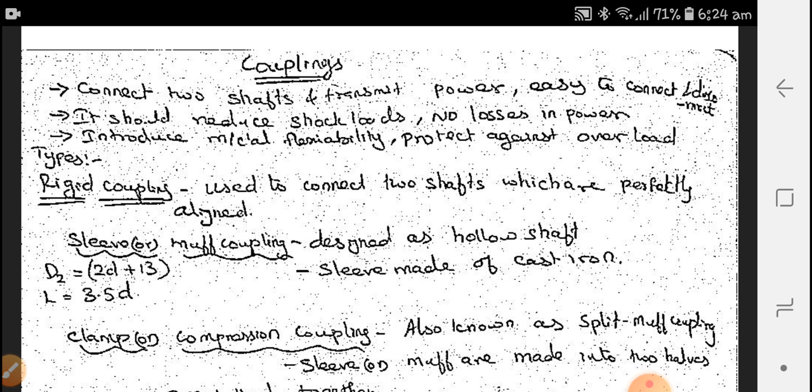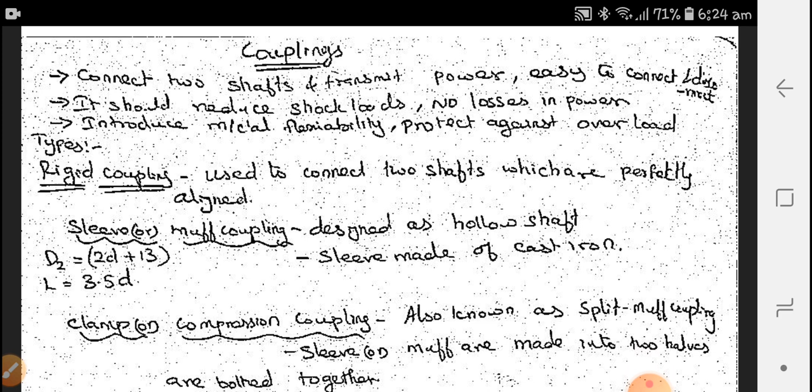Today's topic is coupling. What is meant by coupling? Coupling is a member which connects two shafts and transmits power easily, allowing them to connect and disconnect. This is the main purpose of coupling. It should reduce shock load, cause no loss in power, introduce mechanical flexibility, and protect against overloading.

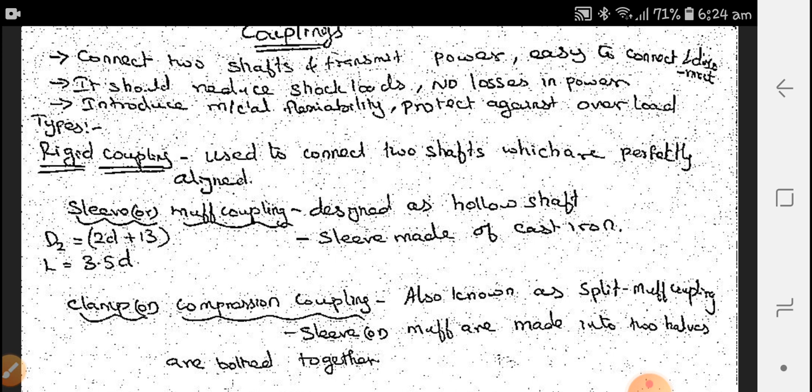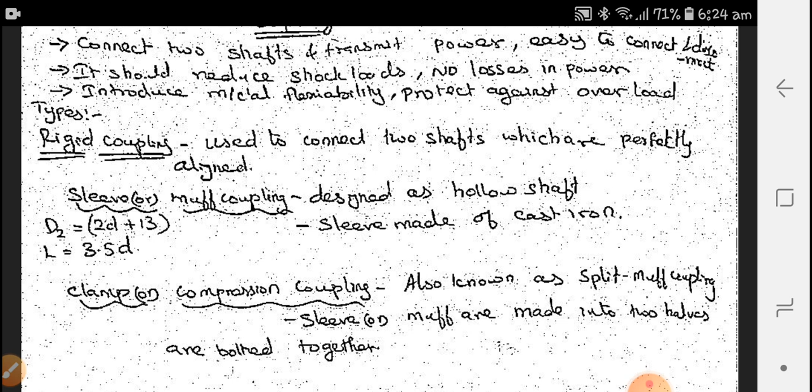We know that there are two types of coupling: one is rigid coupling and another is flexible coupling. Now we are going to discuss rigid coupling. Rigid coupling is used to connect two shafts which are perfectly aligned. What is meant by rigid? There is no deformation, there is no dislocation. So from the name itself you can know that rigid coupling is very strong.

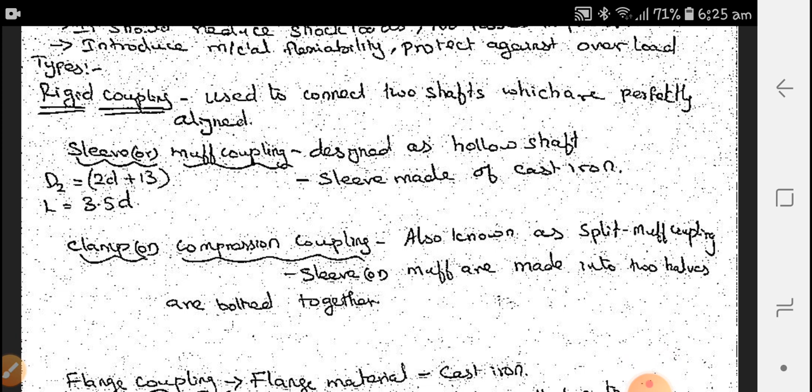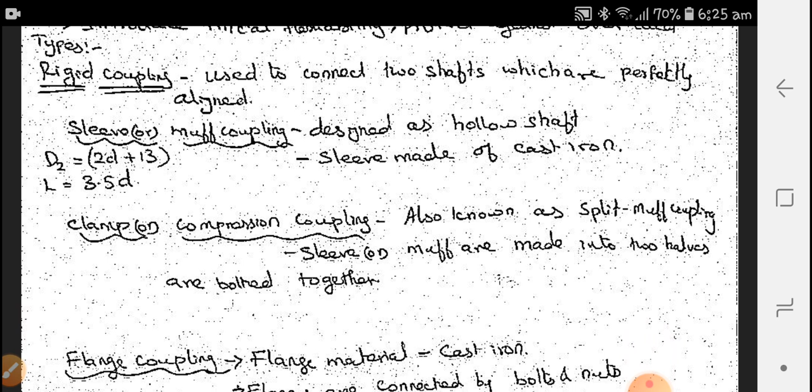In rigid coupling, sleeve or muff coupling is one type. The sleeve or muff coupling is designed as a hollow shaft, and mostly the sleeve is made of cast iron. Two parameters are considered important: capital D, the diameter of the hollow shaft or muff coupling, which is 2 into d plus 13; and small d, the diameter of the shaft; and L is 3.5 times the diameter of the shaft.

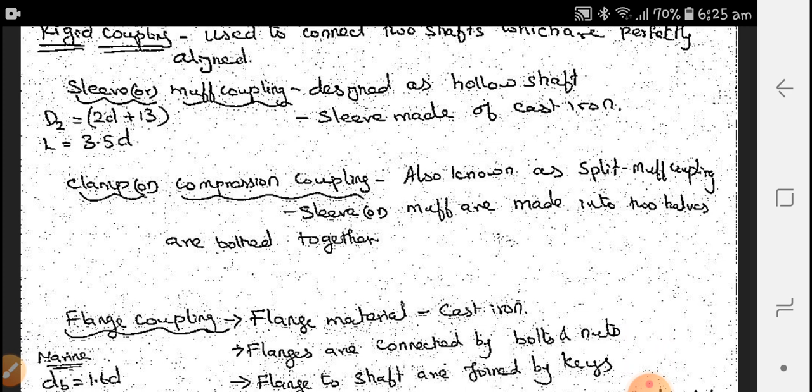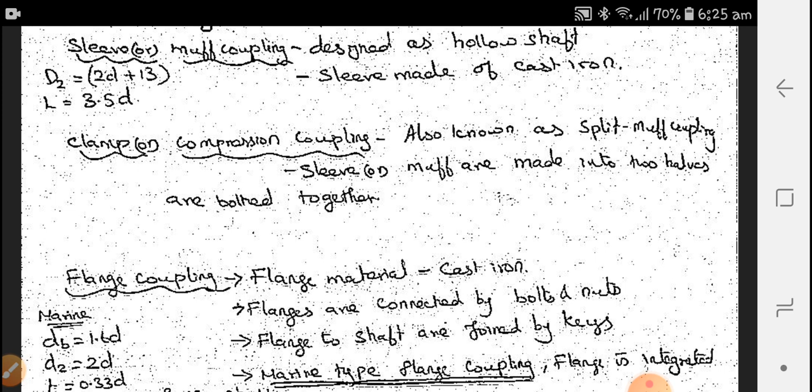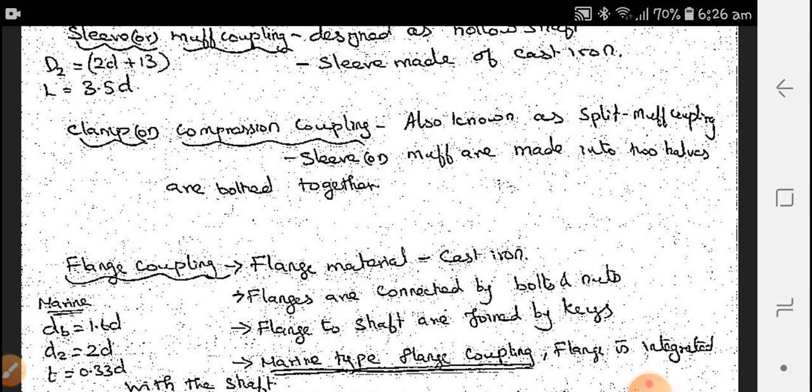The next one is a clamp or compression coupling, also known as a split type muff coupling. It is a modified form of muff coupling where the sleeve or muff is made into two halves and bolted together. This is the clamp coupling or compression coupling. All the design parameters are the same as the sleeve coupling.

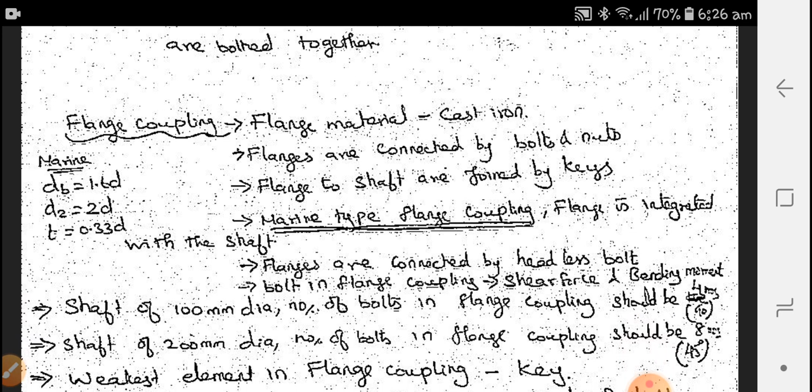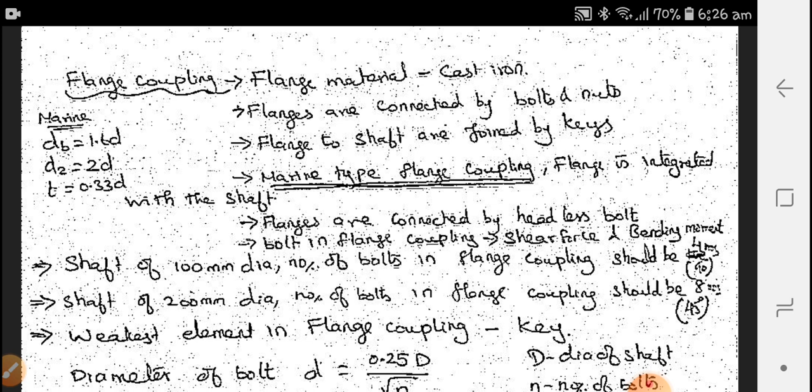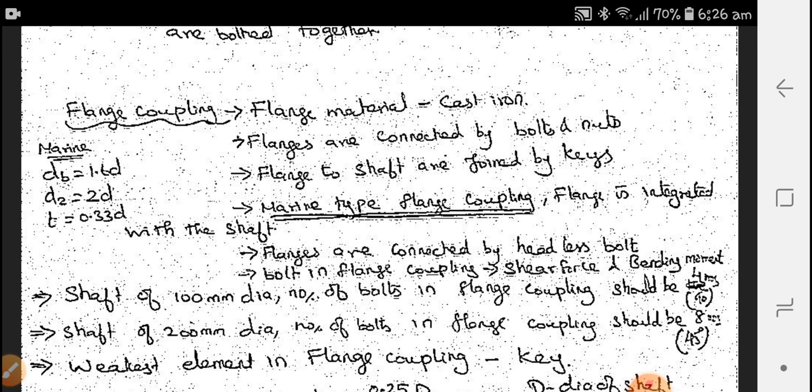The next important one is flange coupling. Flange coupling is of two types: a normal flange coupling and a marine type flange coupling. In flange coupling, the flanges are made of cast iron and connected by means of bolts and nuts. The two shafts are joined by means of a key. In this flange coupling assembly we have three parts: the shaft, the flange, and the key and bolts. Bolts are used to tighten the two flanges, and keys are used to hold the flange and shaft.

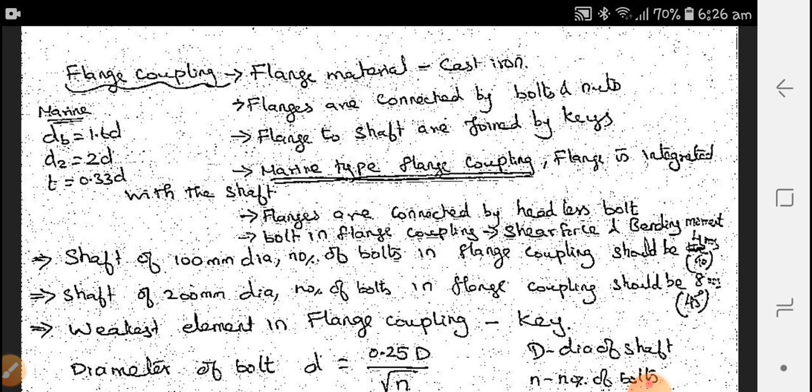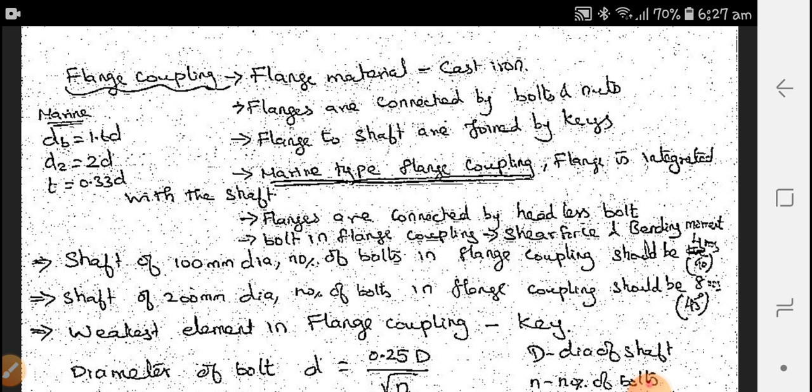The next type is the marine type flange coupling, where the flange is an integral part of the shaft. Therefore, in marine type flange coupling there are no keys available. From this you can say that in marine coupling there is no key. The flanges are connected by headless bolts, like studs.

Bolts in the flange coupling are subjected to shear and bending. This is a very important point: bolts in the flange coupling are subjected to shear force and bending moment. Like a beam, such as a cantilever or simply supported beam, it will fail due to the shear force and bending moment produced while transmitting power.

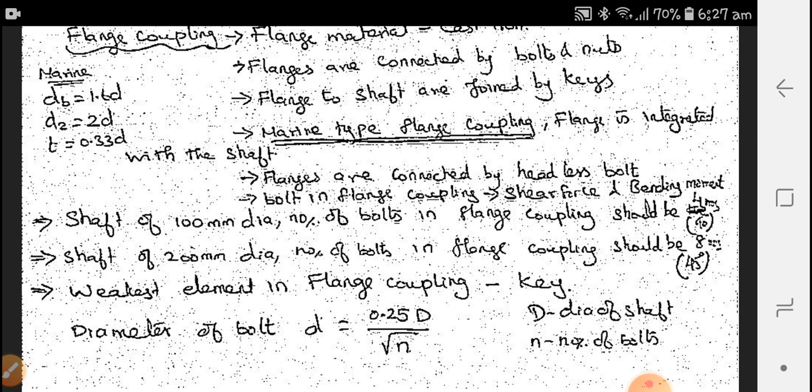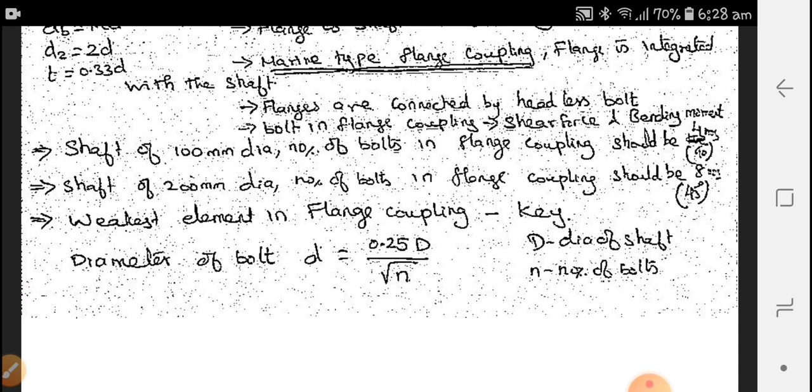For a shaft of 100 mm diameter, the number of bolts in the flange coupling should be 4, each at 90-degree angle. If the shaft is 200 mm diameter, the number of bolts needed is 8, at 45-degree angle. In this flange coupling assembly, the weakest element is the key.

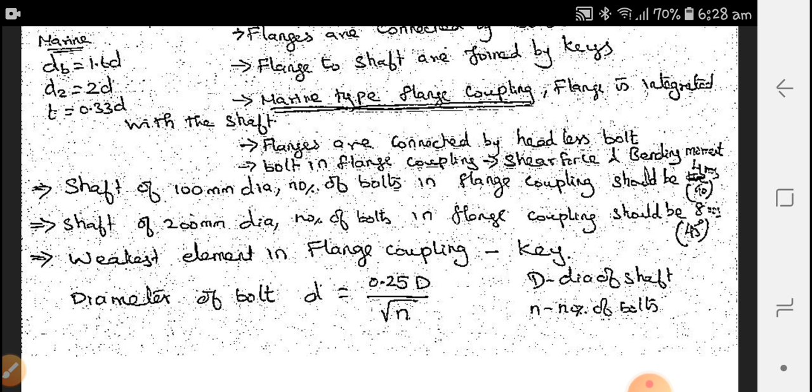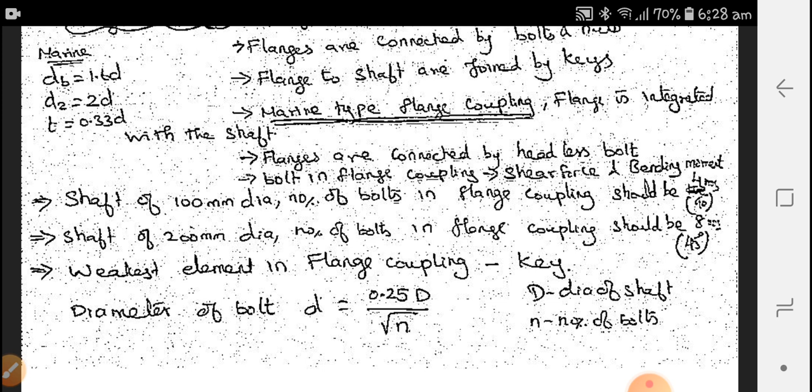You may get a question like this: in an assembly design which consists of a coupling, a key, and a shaft, which one is the weakest material? Which one is the weakest element? You can get an option of key. You should select the key.

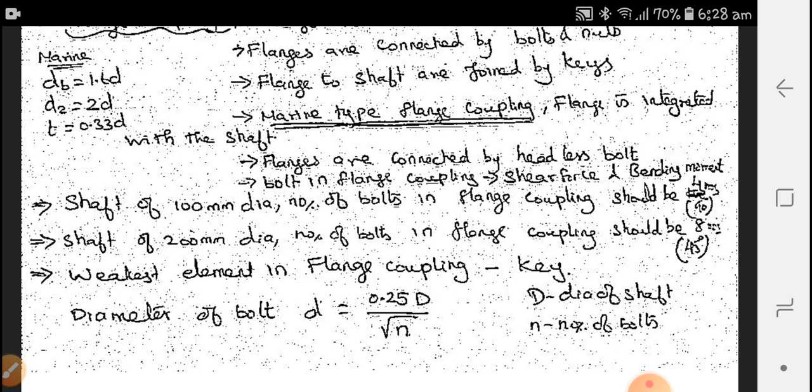Here, the diameter of the bolt, small d, is equal to 0.25 times capital D divided by root of n. Capital D is the diameter of the shaft, and n is the number of bolts.

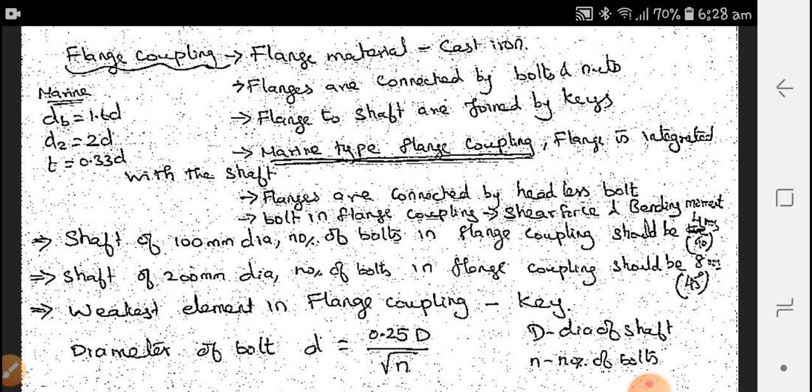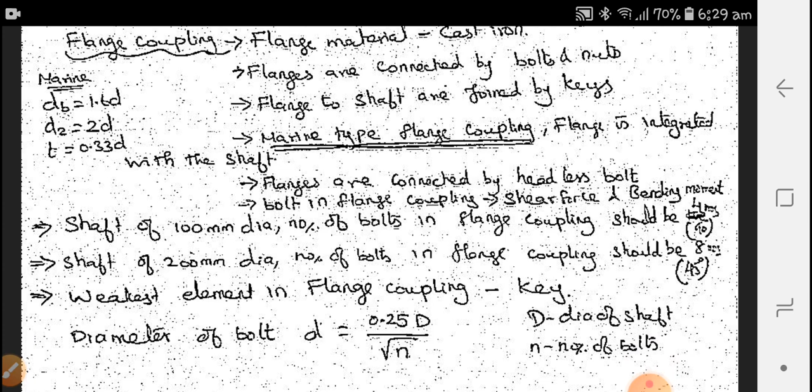In the marine coupling, the parameters we need to know are: first, dB is equal to 1.6 times small d, where small d is the diameter of the shaft. D2 is 2d, and the thickness T is 0.33 times D.

Next we are going to discuss flexible coupling. We have three types of flexible couplings: bushed pin flexible coupling, Hooke's or universal coupling, and Oldham's coupling. First we will discuss bushed pin flexible coupling.

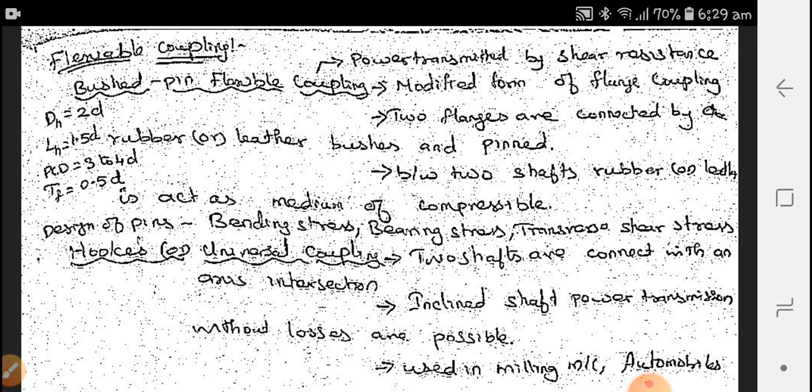In the bushed pin flexible coupling, the important design goes to the pin, because the design of the pin is very important. The pin undergoes bending stress, bearing stress, as well as transverse shear stress. So the design of the pin is very much important. The diameter of the pin represents how much power it can transmit.

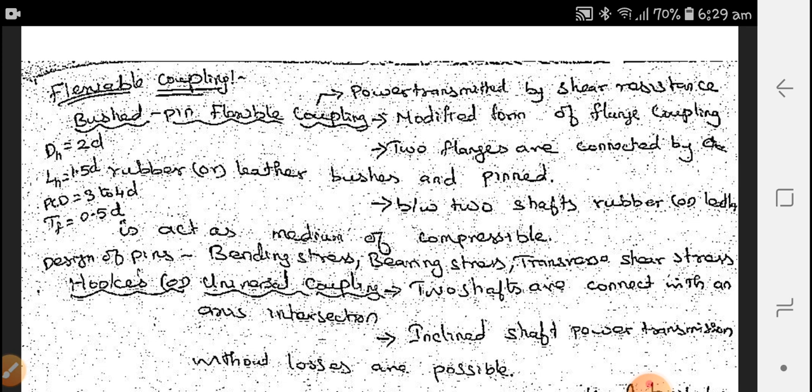In this flexible coupling, the power transmission is done by shear resistance of the pin. The most important thing is that it is a modified form of flange coupling. Since it is a flexible coupling, we have rubber bushes and leather bushes used to couple the flanges. The flange coupling is a rigid coupling, but the bushed pin flexible coupling is a flexible coupling.

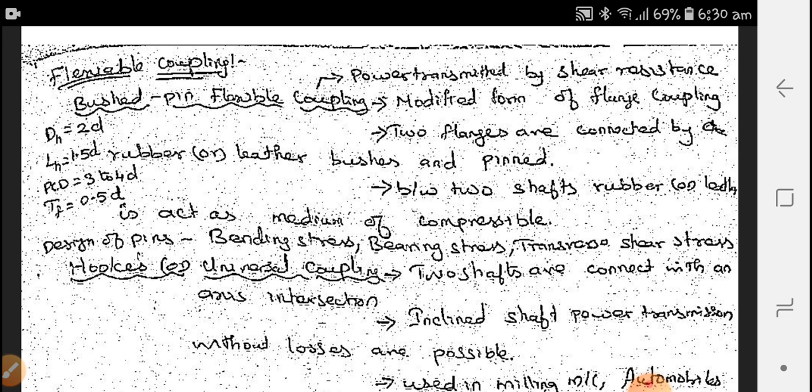In order to make the difference, we use rubber and leather bushes and pins to couple the flanges. Between two shafts, rubber and leather act as a compressible medium, and they take care of small deformations. The small amount of deformation can be permitted, that is why it is called a bushed pin flexible coupling.

Next is the Hooke's or universal coupling. Mostly we see this in automobile differentials as well as automobile steering shafts. Universal couplings, or Hooke's joints, connect two shafts with an axis intersection. The inclined shaft power transmission without losses is possible, which is used in milling machines and automobiles. Most of the time you can see this in automobiles as a universal coupling.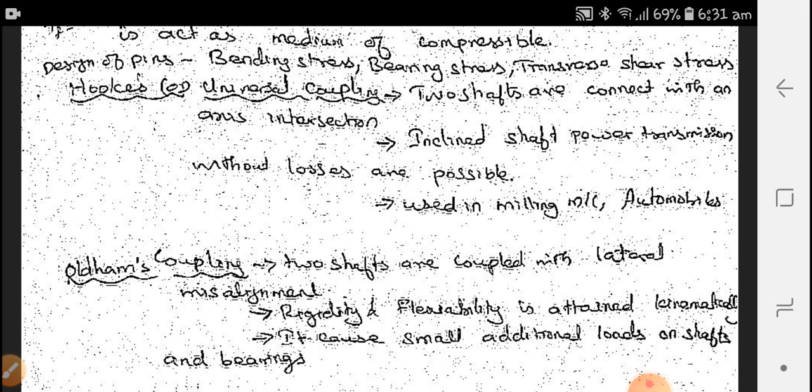So intersecting shafts can be connected, and power transmission between intersecting shafts is possible. The next one is Oldham's coupling.

Oldham's coupling is an inversion of a double slider crank mechanism, and it transmits power with a small lateral misalignment. Since the driver and driven shafts should be parallel, the axis of the driver and driven shaft should be parallel, but a small amount of lateral misalignment is permitted. That is why it is a flexible coupling.

The two shafts are coupled with lateral misalignment. Here, the rigidity and flexibility are attained kinematically. It causes small additional load on the shaft and bearings, which is a very important thing.

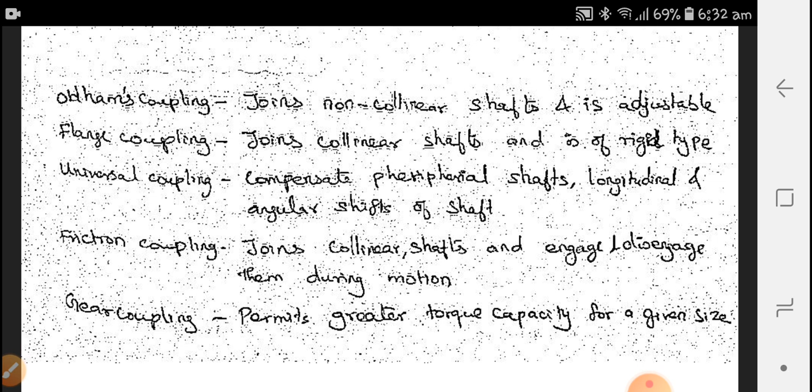Next we are going to talk about some couplings used in mechanical engineering applications. The Oldham coupling joins non-collinear shafts and is adjustable, while flange couplings join collinear shafts and are of a rigid type. Universal coupling connects peripheral shafts with longitudinal and angular shifts of the shaft. Frictional coupling joins collinear shafts and engages and disengages them during motion. The friction coupling is otherwise called a clutch.

Next is the gear coupling, which permits greater torque capacity for the given size. This is a gear train, which we also call a gear coupling.